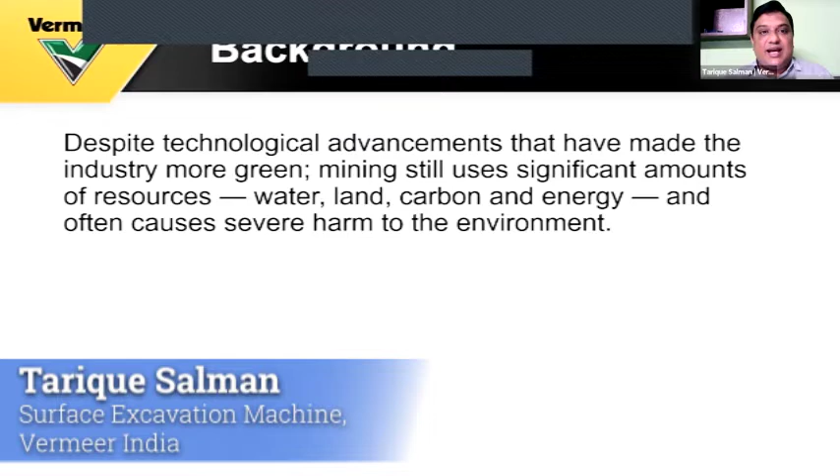Quick background: despite technological advancements that have been made in the mining industry to make it more green, mining industry still uses significant amounts of resources like water, land, carbon and energy, which often causes severe harm to environment. There is a lot of development which needs to be done in this field to make mining more sustainable. One thing we can do as a team is to strike a balance between all the factors, be it economic, environmental, or social, so that we make a better place for our future generation.

Before I go about precision surface mining, let's talk about the negative impacts of blasting. Number one, fly rocks. As you are all aware, fly rocks can travel very fast, achieving a speed of up to 600 meters per second and can fly up to a distance of 600 meters, creating damage to neighboring inhabitants.

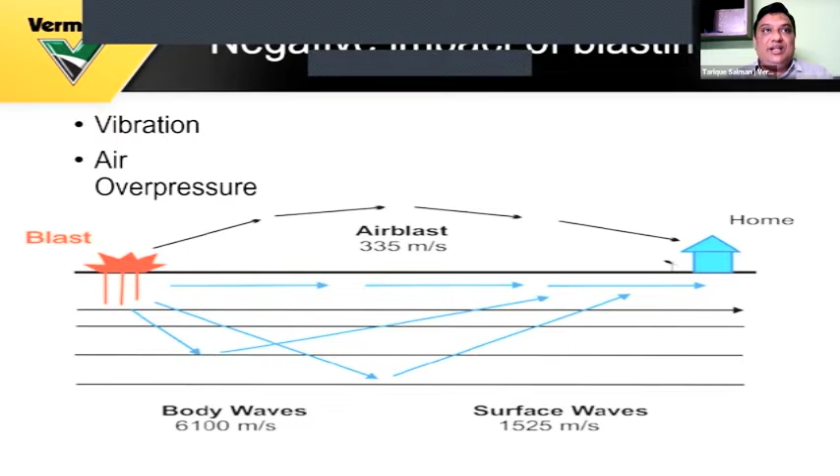Another point I would like to highlight as a negative impact of blasting is air overpressure. The air blast can travel at a speed of 335 meters per second, and can cause a lot of damage to nearby buildings and glass structures.

My colleague Mr. Rishi has already stated that when you see a lot of smoke there, it is generally dust and not emission from the vehicles working in the mining areas.

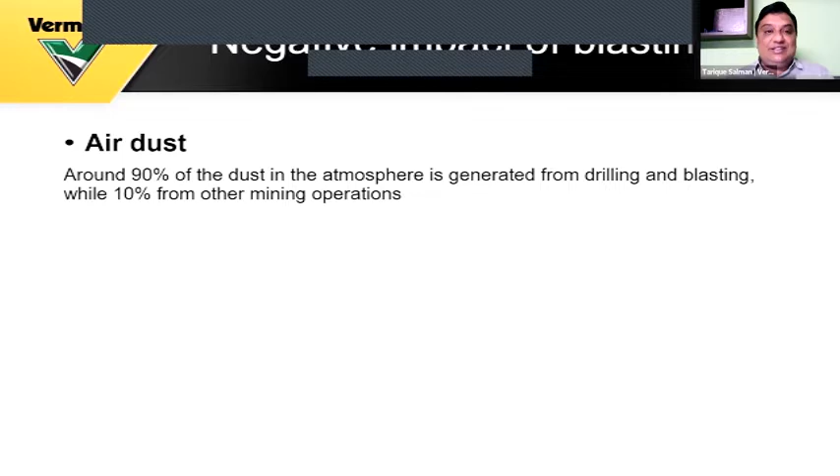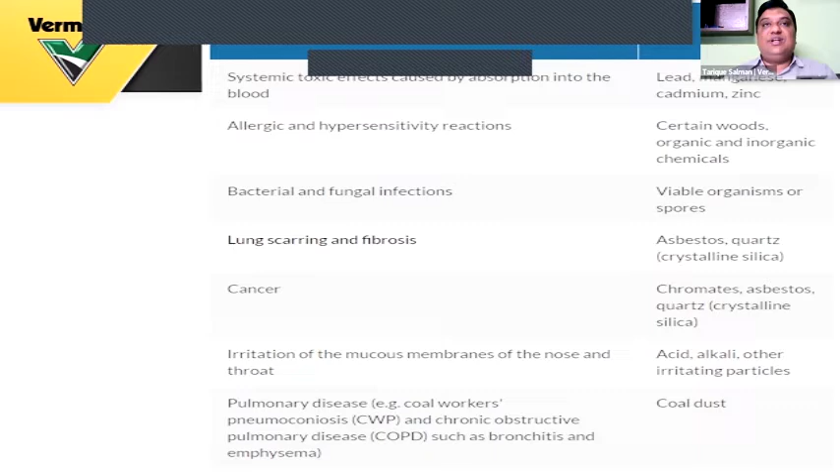I would like to add that 90% of this dust in the atmosphere is generated from drilling and blasting, while 10% is from other mining operations. This dust is creating a lot of health hazards, right from small breathing troubles to as severe as cancer and pulmonary diseases. So depending upon the type of mine where these procedures are used, it's a big health hazard for all the mining workers as well as the inhabitants living in close by areas.

Another important area of concern is gas emissions, not only from mining vehicles, but also NOx emissions from blasting. This chart shows a recent study done in the US where they observed up to 195 tons of nitrogen oxide emission in mines where blasting is used.

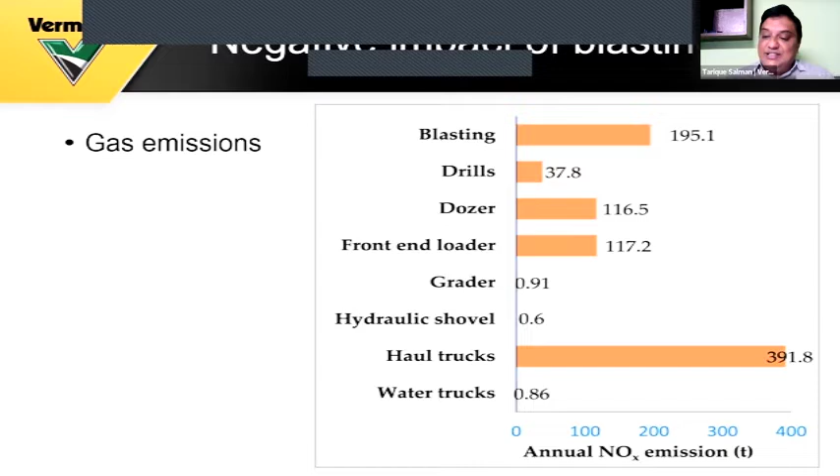So how do we achieve sustainability? Number one, we can lower the impact. We can use lower impact mining techniques, like electrical vehicles, as Tata Hitachi has been promoting. This is one aspect which can be used. Also, if you talk about in-situ leaching, these techniques reduce the exposed areas, giving a better approach in terms of environmentally friendly mining procedures.

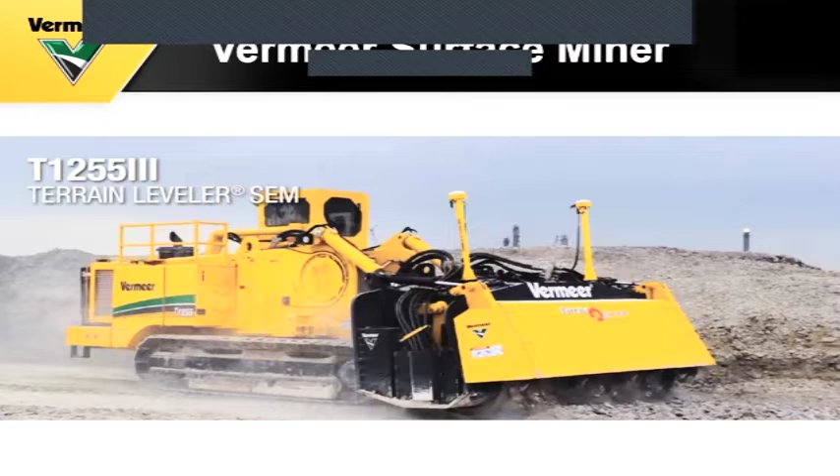Second step, you can reuse the mining waste, and third, use eco-friendly equipment. When you talk about surface mining, Vermeer has developed surface miners which are not only very fuel efficient, but also have a lot of features created or developed keeping the environment in mind. I would like to share a small introduction video of the equipment first.

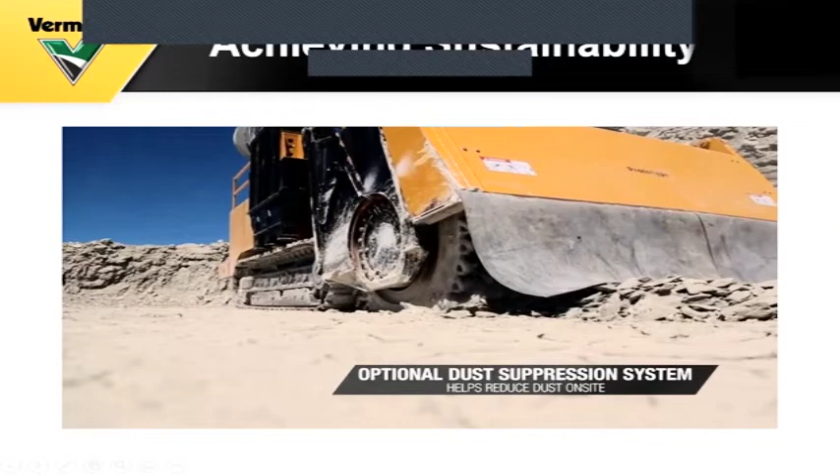So precision surface mining not only eliminates drilling, blasting and ripping, but also lets you increase your mining production by working closer to inhabited areas. Since the machine doesn't require setup, you can start quickly once the machine reaches a site. Not only this, you can add to your production capacity without increasing the pressure on your primary crusher.

Also, since the mining equipment is generating consistent smaller size cut materials, the throughput to the secondary crusher is quite improved.

Since it completely eliminates drill and blast, you can extend your mining boundaries, because we have seen in the past that mines have almost abandoned areas very close to the village, unable to do mining activities because of villagers objecting to drilling and blasting procedures. So with the surface miners, we can work very close to buildings, roads, other equipment, and cement plants in particular.

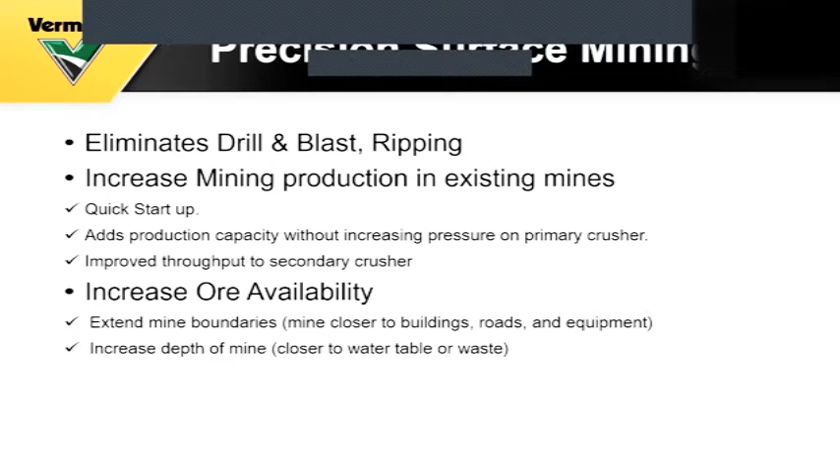Not only this, you can also increase the depth of mining. You can work very close to the water table or waste sidings, etc. Now, dust, as our colleagues have already spoken, is quite a big health hazard, and Vermeer has developed a dust suppression system which uses a vacuum to suck up all the dust generated while cutting the material, and it is released onto the tracks. Once the machine moves forward, all the dust collected in the vacuum bags gets released, and this reduces up to 95% of the dust generated compared to conventional methods.

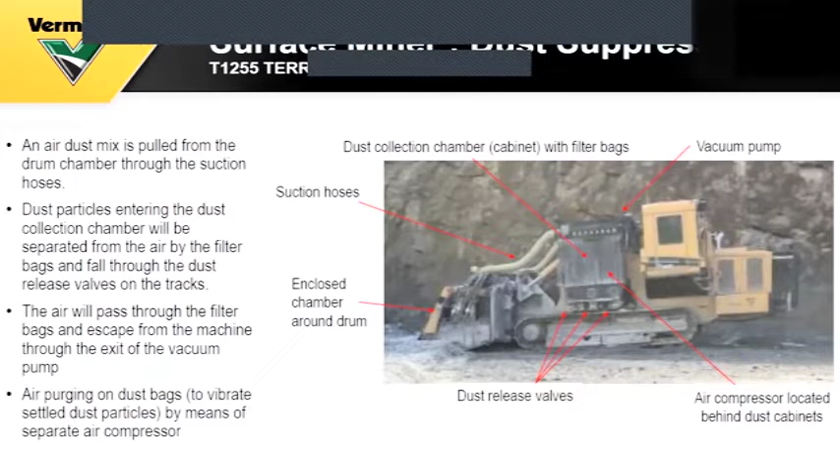Here is a brief video which talks about dust suppression in detail. Hello, my name is Patrick Robinson with Vermeer Corporation.

Dust is a major concern in mining and quarrying applications due to urban encroachment and environmental concerns. Today I'd like to share with you some information on the T1255 terrain leveler surface excavation machine with optional dust suppression and how it can help reduce some of those concerns.

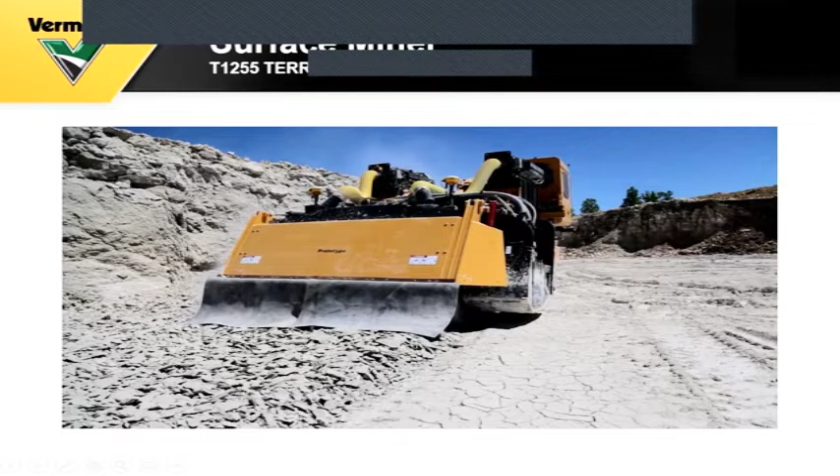The dust suppression system features an enclosed cutting head with two large vacuums that pull dust from the enclosed cutting head into bag houses. The collected dust is then dropped beneath the machine to reduce dust entering the air, making for a better environment. As mentioned, encroachment is another issue that many quarries must handle.

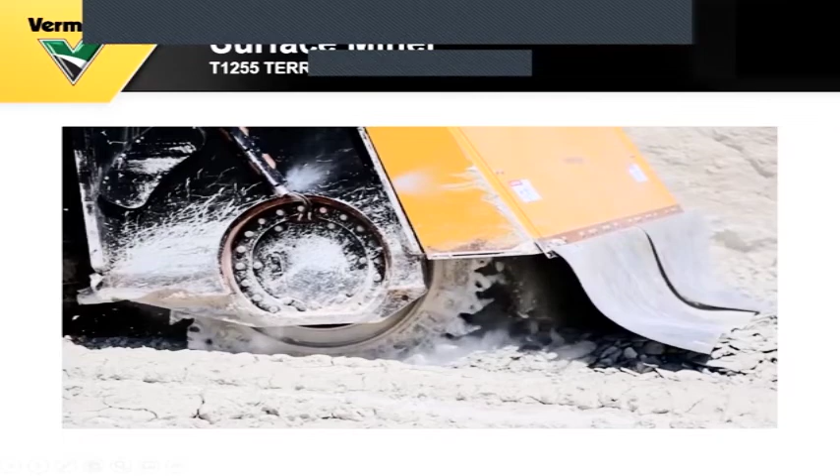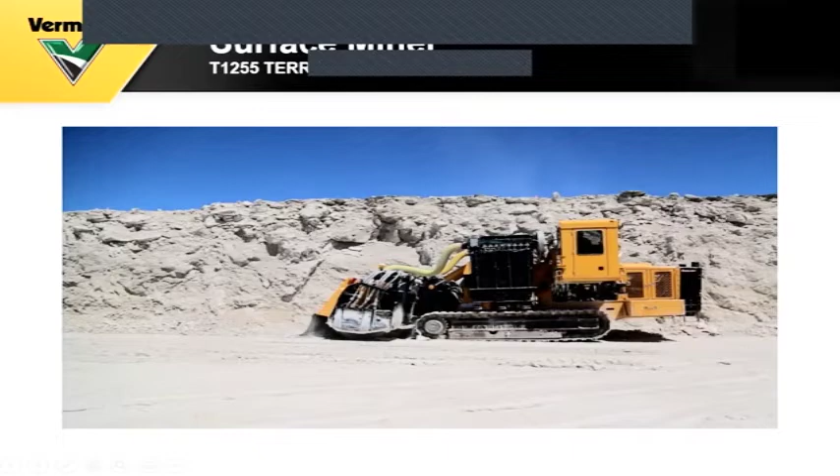It's increasingly important for quarries to coexist with an expanding urban environment. With the dust suppression system, the Vermeer terrain leveler machine will be able to utilize more of the quarry without being disruptive to residents nearby, allowing the quarry to potentially extract more material.

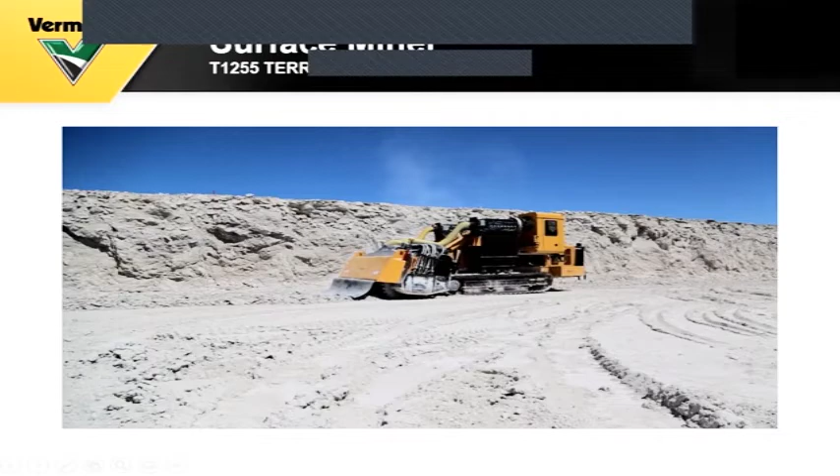Finally, conservation is an important issue to many quarries since water is such a precious resource. This is a waterless system, and it helps reduce the need to source water used to control dust during the mining process. For more information on Vermeer machinery and the dust suppression system, please contact your local Vermeer dealer or visit us at vermeer.com.

Another important concern which the factory has taken up is the sound abatement. If you can see these pictures, we have done quite a bit of research. We have already made certain arrangements in the cabin and other unit body so that sound is being abated.

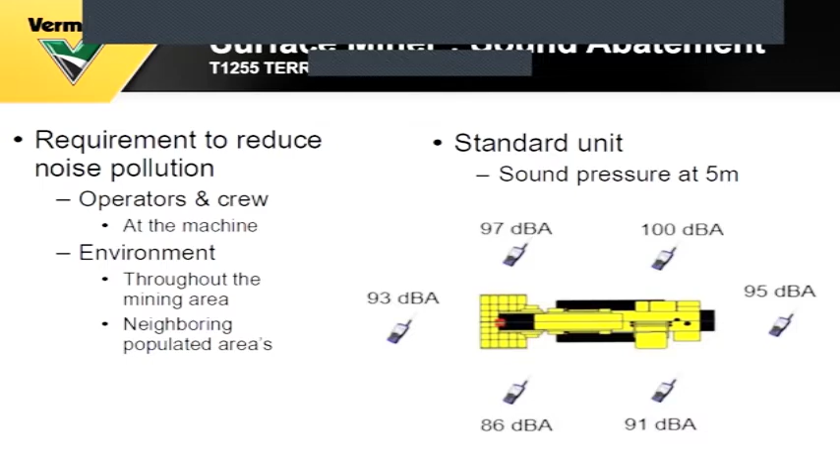But still, if you talk about sound pressure at 5 meters, initially we have seen that up to 100 decibels is there. And we have done another research, and now we have improved the sound abatement to up to 85 decibels, which is much more reduction, and you can feel almost the machine is silent, and you can even talk while the machine is operating, standing next to it.

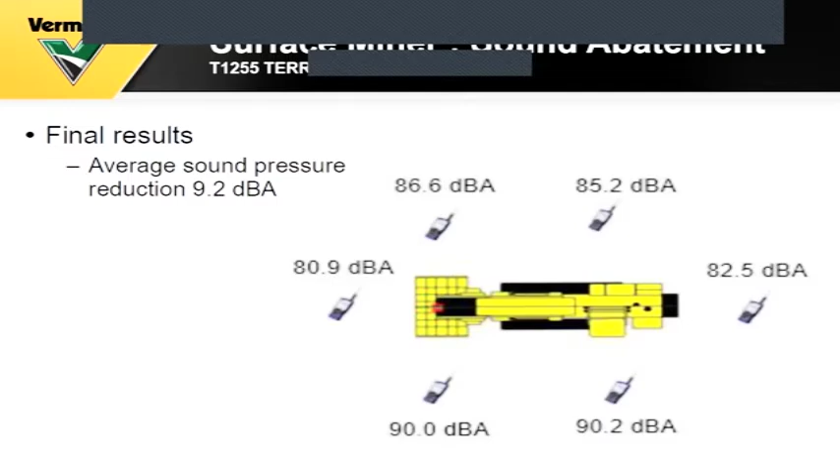Talking about the technology and the operation software, Vermeer has inbuilt operation software which we call as SmartTec system. It not only measures and monitors all the performance operations.

But it also helps the operator to optimize productivity, and it will suggest all the control systems, whether they are optimized or not, and it will send an alarm to the operator so that he can improve his operational skills.

Not only this, it has even capabilities of recording shift-wise performance parameters, so that the manager or fleet owner can identify whether the operator in working shift A or shift B is producing more output, and then it will help in more product training, as well as the improvement of the machine's performance.

Not only this, we have this system which alerts the manufacturer itself if there are any service issues in the machines due to operational error. Not only this, the machines are capable of doing self-diagnosis, and that improves the service technician's ability to do the diagnosis of the machine when the machine is down.

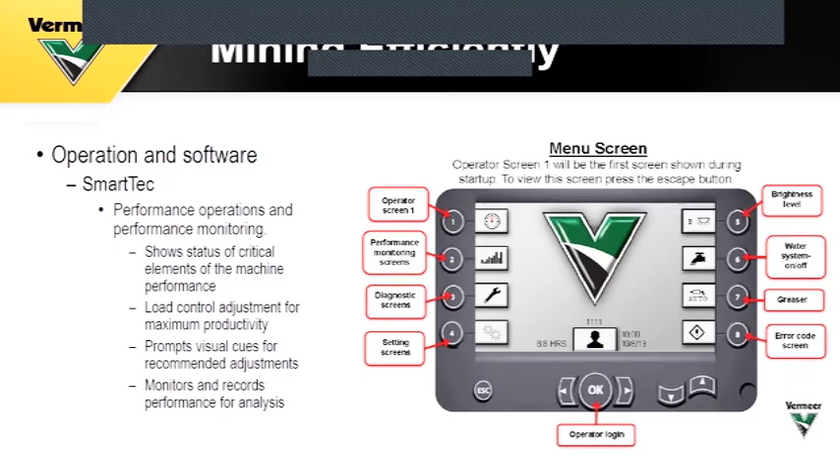Another important feature is that we have a system wherein the mine plans can be inbuilt using a GPS system, which we call as GNSS system, and that will cut as per the mine plans.

And we can not only do simple straight mining, but also we can do slope mines, and we can create ramps, pit sumps, and also we can make roads, mining haul roads, where in areas where the rainfall is more, we can do slope mining, so that all the water during rainfall gets drained out into the sump areas.

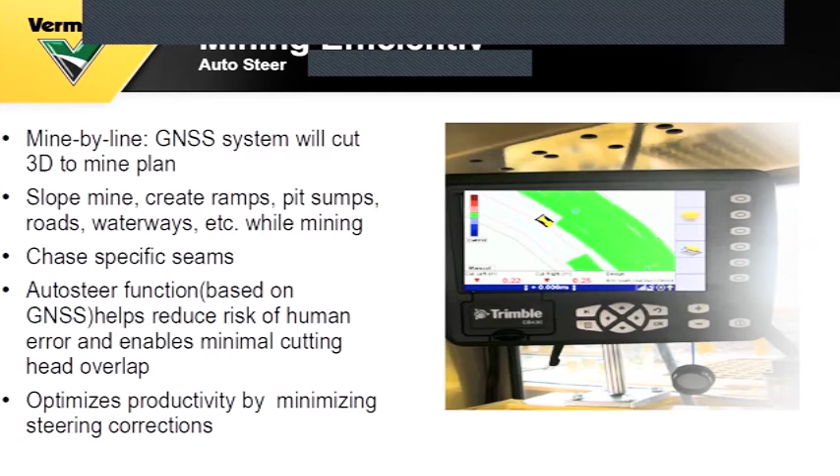The auto steer function based on GNSS reduces the risk of human error, and it also enables minimal cutting head overlap, and that helps in improving the productivity, because as an operator we avoid human error by recutting the cut materials. So that helps in increasing the productivity, and it also optimizes the productivity by minimizing steering corrections if you are using GPS.

While we do concern about the productivity, the safety is of our utmost concern, and there are a lot of operator safety parameters, like the operator presence system, which is a system that disengages the clutch and other functions.

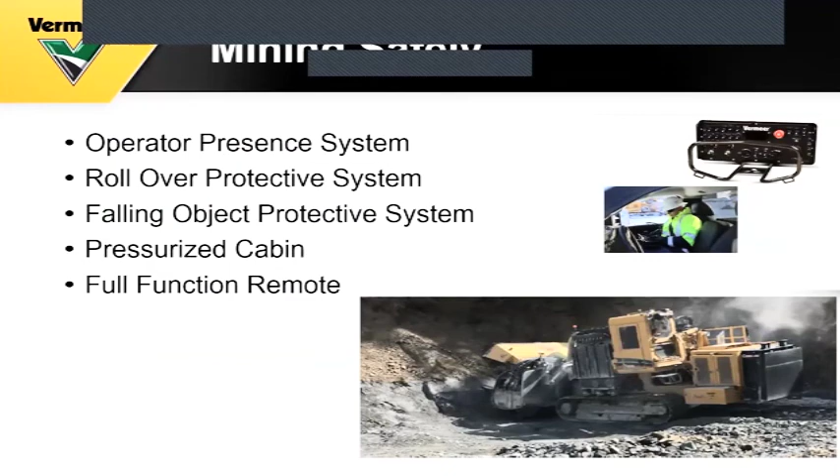So not only this, we have a rollover protective system. In case the machine overturns, the operator is safe. And then we have a pressurized cabin, wherein all the air is sucked up and filtered for the operator's comfort and safety.

And then we have a full function remote system, which can be operated when the machines are working near hilly areas, and the operator is basically standing out and sitting in a vehicle and operating the machine rather than sitting in the machine itself.

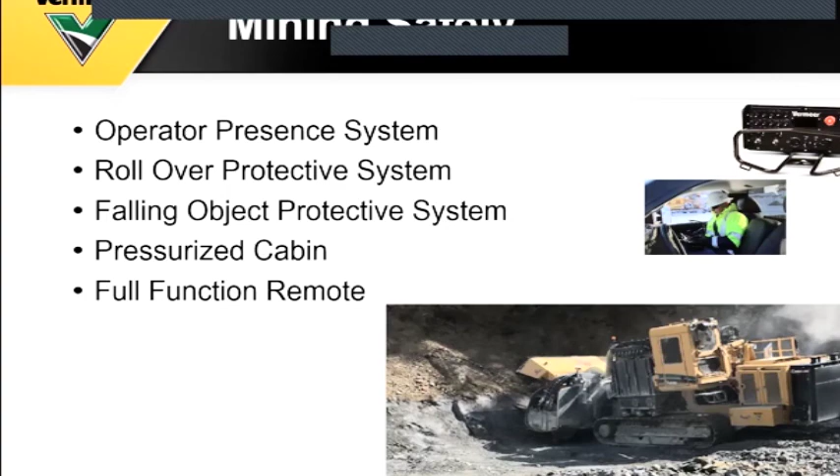So I would like to say that the future of mining is precision if we are to take care of our environment. So I would like to thank you.